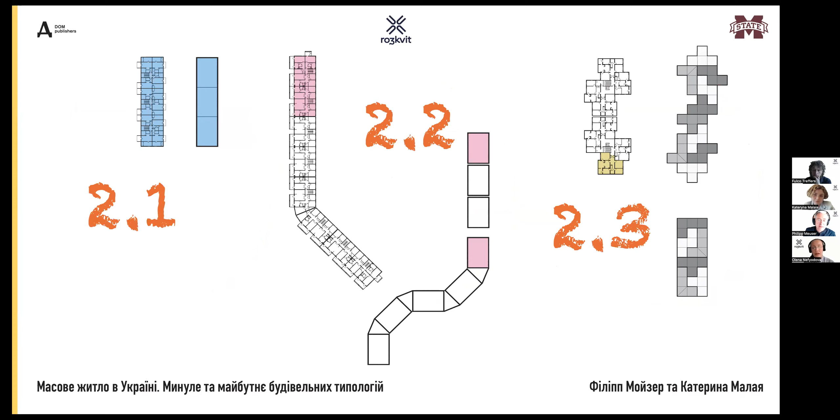Just to give you an idea of how deep we're trying to structure these typologies systematically, I picked out the second chapter, Soviet mass housing, to give you an idea about the generations. From earlier studies, we know the mass housing in the Soviet period spans from the late 50s to the late 80s. There are different generations, and following this method to identify series and systemize them into generations helps us understand the potential for reconstruction and remodeling, and also how to recycle certain elements.

We won't go too much into detail in this lecture, since that would be a whole separate lecture. But just to give you an idea how to find the difference between the generations - it's just a matter of size and scale.

So the first generation, shown on the left in blue, the type projects were always planned and built with different sections, but only the smallest unit that could be used within the urban grid was a full house, including different sections. Here we see three sections, and they were more or less repeating each other.

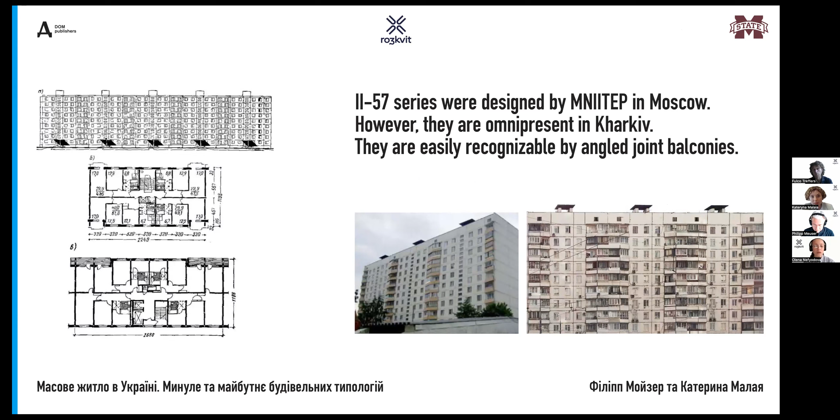Philip, could you go to the next slide, please? So when we were looking at images of damage in these housing structures, II-57 is the one we were particularly able to identify very easily in the Kharkiv neighborhood of Saltivka. There are a lot of these buildings, and many of them were damaged.

What does that kind of information give us? So when we know the series of a building that has been damaged, we practically automatically know what kind of panels went into construction, and what kind of apartment layouts exist inside of that building. This does not mean that we can absolutely predict the amount of structural damage the structure has taken, or how much the load-bearing capacity of the panels is compromised. But at least we know the types of panels that were damaged, and the types of buildings that were damaged in every given neighborhood.

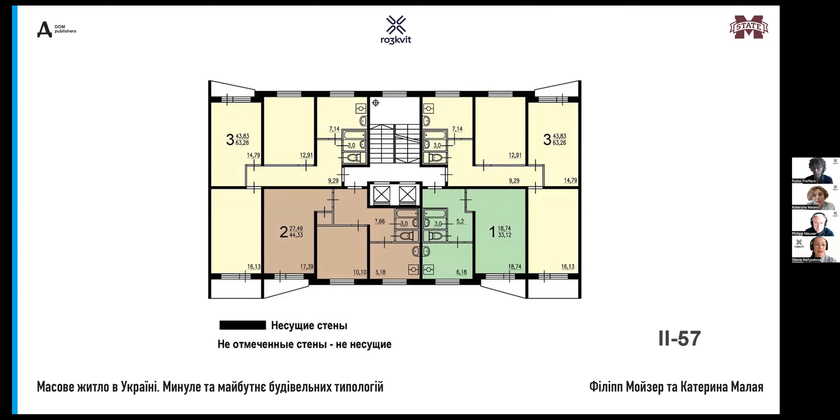With all these series, the entire concept of serial design and serial building of apartment buildings is that they're all identical, at least when it comes to plans. Because we know the series type, we automatically know what's inside of the building, or at least which walls are load-bearing and which are not. This particular image comes from a catalog released by the Moscow Institute for Type and Experimental Design to indicate which walls were okay to touch in buildings they designed during the Soviet years, and which walls were not okay to touch. Partition walls are marked in white, and load-bearing elements are marked in black.

Another series we wanted to look at has not been that damaged in Kharkiv, but is so omnipresent around Ukraine that we pretty much know buildings like that were damaged in Mariupol. Buildings like that are found pretty much anywhere in Ukraine, and this is also a Ukrainian design series.

So what exactly do we mean by Ukrainian design series? The entire Soviet system of serial design functioned based on institutes. There were central organizations in Moscow, like the Central Experimental Institute for Housing Design, which after 1963 mostly approved projects coming from specific regions. There were also regional design institutes, founded based on different climate zones. Ukraine was climate zone 3 according to the Soviet system, so it ended up with its own housing design institute in Kyiv, called KyivZDNIEP.

Tashkent, the capital of Uzbekistan, also had its own institute, and so did Tbilisi, Georgia. What ended up happening is that all of these local, so-called zonal institutes developed their own series. They were similar to series elsewhere, but had their own specifics. Oftentimes, like with 1480, these series were first developed in the early 50s, and the design institutes kept building them up further.

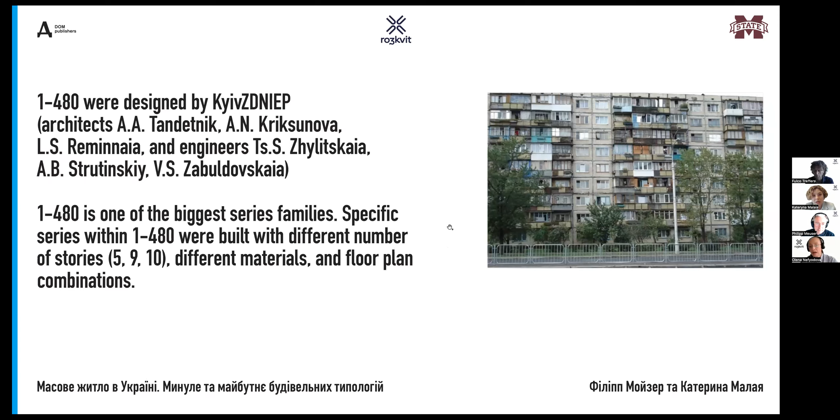1480 is one of the biggest families of series throughout the former USSR, and in Ukraine in particular. It was built in a number of modifications: 5 stories, 9 stories, 10 stories, out of different materials, with different floor plan combinations depending on the particular city in Ukraine. These are just some of the cities mentioned here: Zaporizhia, Donetsk, Luhansk, and there are plenty in Kyiv and in Mariupol.

Depending on the type of city, the buildings would differ, and oftentimes materials would be local. For example, in Donetsk and Luhansk, the materials used to develop this series would be slag concrete blocks, because there was plenty of slag. Whether that's good or not is a different question, since slag can be fairly radioactive, but that was the regional adaptation. For these types of buildings, there would be different structural ideas depending on the city and region.

This is a later modification of the same 1480. Everything started with classic-looking 5-story Khrushchevkas, sometimes brick or brick-block Khrushchevkas, considered slightly better. Then it moved into a 9-story modification, again with various nomenclatures. The most famous one, built all over Kyiv, is 1 kg 480 12U, and the same exact thing with 11U. Those were buildings oriented north to south or east to west, but the same exact buildings were built throughout.

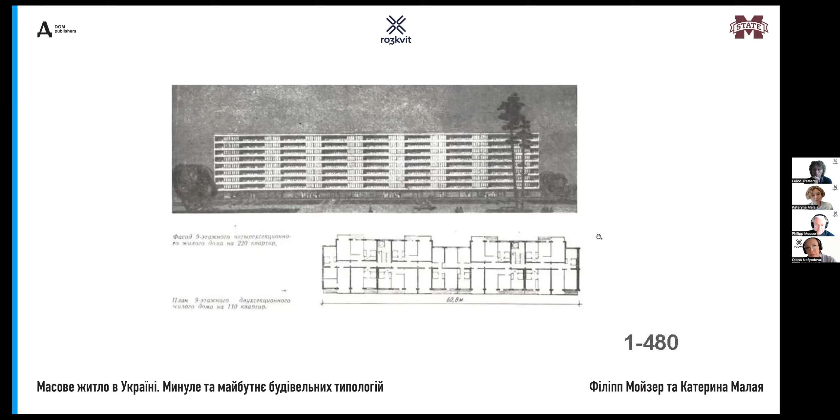This is perhaps one of the more important slides of this lecture. If we know a series, we know the specs and all the details of how the panels were connected. We pretty much know everything about the structure of the building before we ever have two engineers on site checking its structural integrity, or before we make any decisions on potential recycling or reuse.

When it comes to 1480, we know that all of these series were built on three longitudinal load-bearing walls. We also know the exact dimensions for spans and clear spans: 320 centimeters and 482 centimeters. We know the exact floor heights too — depending on the year, they would be slightly different, but still we know them.

If these buildings were built in coal mining regions, we also know that they had ferroconcrete belts built around each section in order to hold the building from deformations possible due to the grounds not being settled. We know all of the possible details of how the armature was welded together and cast into each specific panel, thanks to the fact that all these buildings were built in series.

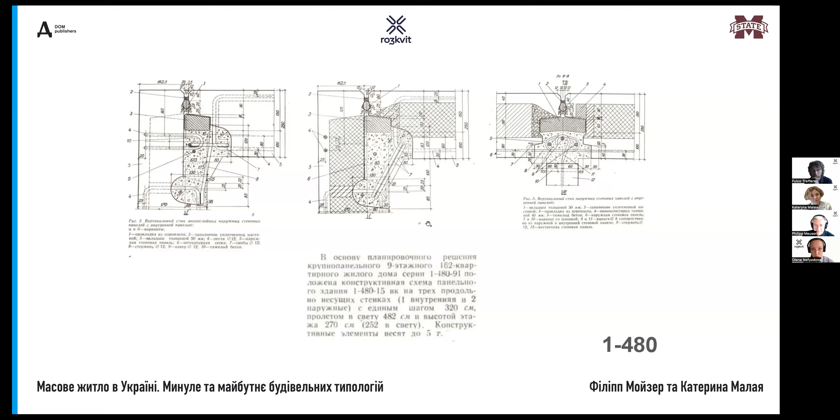Just one more example, a good one of what happened with these buildings and what matters. I talked about structural qualities and potential reuse, but there were also changes in the apartment plans that are important to understand before making any decisions on reconstruction, demolition, reuse, or preserving them.

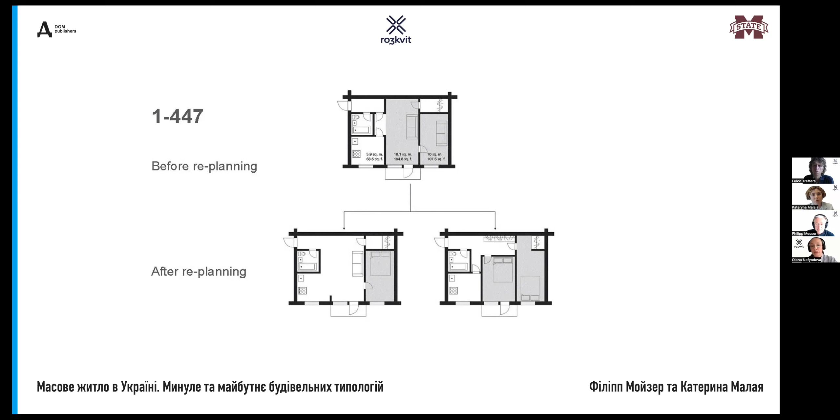Why were these remodelings possible? In Khrushchevkas, partition walls were built from gypsum concrete—pretty firm, not load-bearing material. Nothing bad about it if it was manufactured correctly.

The only problem was that this kind of material was not available to consumers. So if consumers wanted to replan their apartment—say the number of family members decreased or increased, or they considered the kitchen inconveniently small—they couldn't, because none of these partition wall materials were easily available. The only thing they could do was construct a wall out of sheathing, something like dranka in Ukrainian, which isn't very convenient.

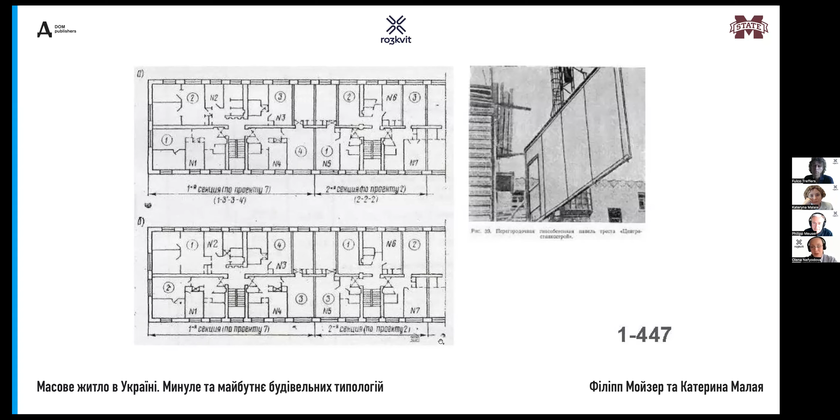What really changed in the 1990s is that drywall, or dry gypsum boards, became easily available to consumers in the post-Soviet construction markets. That meant people could take their old gypsum concrete partition walls and rethink their apartments completely however they wanted. Of course, if you've been inside those apartments, you know it sometimes resulted in questionable aesthetic solutions, but that's not what matters to us.

Knauf had an incredible market in Ukraine, and it's a shame that Knauf publicly announced they will not leave the Russian market. So the destiny of Knauf in Ukraine after the war is unknown for now.

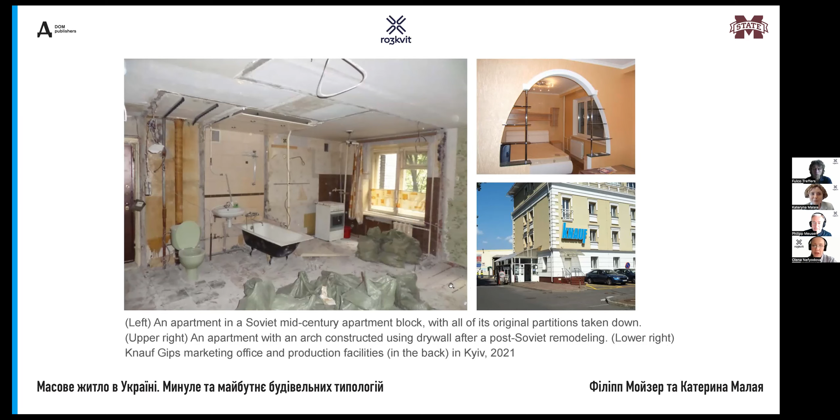I wanted to finish this conversation about remodeling by showing a couple of examples from 1-480 apartments and explaining what exactly happened and why it matters. First of all, in Khrushchevkas of the early series, storage was not necessarily sufficient for the contemporary context.

We all know that these days we own way more stuff than 50 years ago, hence we need more storage space. We also know that kitchens in these apartments were small if a larger family lived in them—of course, for one person the kitchen might be sufficient size, but it depends on who populates these apartments. The image on the left is from a real estate website, just to illustrate that these are very widespread apartments in Ukraine.

This version of replanning creates a scenario in which one or two people can have their isolated bedroom space, and their living room or some sort of workspace merged with the kitchen. That means that unlike in the Soviet apartment, where somebody always slept on the couch and somebody always walked past that person sleeping on the couch in the walk-through room to reach that faraway bedroom, in this case there's perfect privacy of sleep, control over one's sleep hours and rhythms, and more sound insulation for the family or individual who lives in this space.

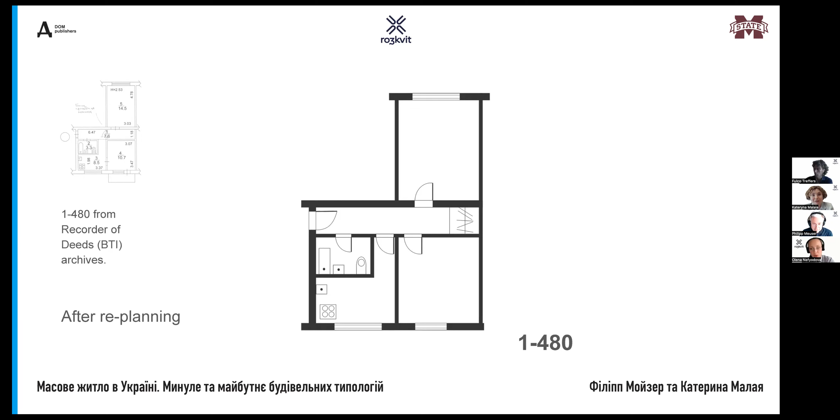Thanks so far for allowing us to go into so much detail with this very detailed presentation. Of course we're focusing on architecture and construction systems, but this knowledge about the building system is so crucial if we talk about the future of housing, and about making decisions on demolishing, recycling, or reusing.

But we also, as architects, have a cultural aspect, and please allow us to quote this French philosopher Claude Lévi-Strauss, who said: classification, even if it is uneven and arbitrary, preserves the richness and the diversity of what it drafts. By determining that everything should be taken into account, it facilitates the formation of a memory.

By giving a systematization to the long history of mass housing in Ukraine, we would like to give a tool for all those involved in the process of reconstruction, recycling, and modernization of the housing market. But we would also like to contribute to a kind of building history, architecture history, and we feel that the history of residential buildings, of housing, is always mainly marginalized in architectural history. We would like to put that on the top level, giving it another priority when it comes to the history and storytelling of the 20th and of course the 21st century.

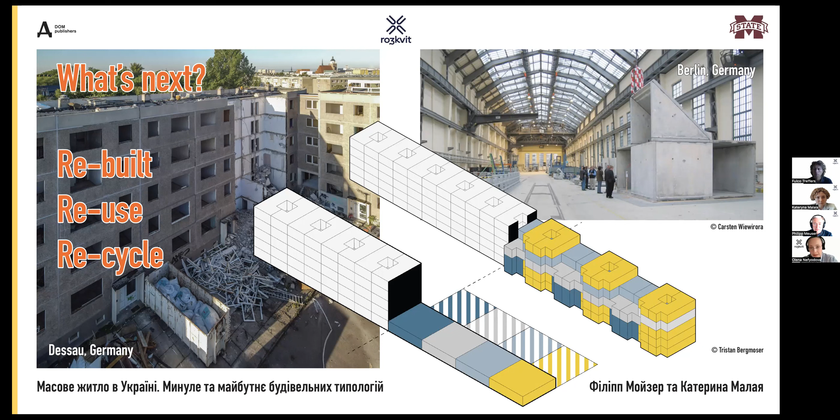Most of the panel buildings, these former state apartment blocks, are still in the ownership of the state or of the municipality, and some of them have been destroyed. We have some experience in Germany on how to modify those typologies, and I think this needs to be discussed in Ukraine—not only typology, but also new ownership models, which might diversify the housing market in Ukraine.